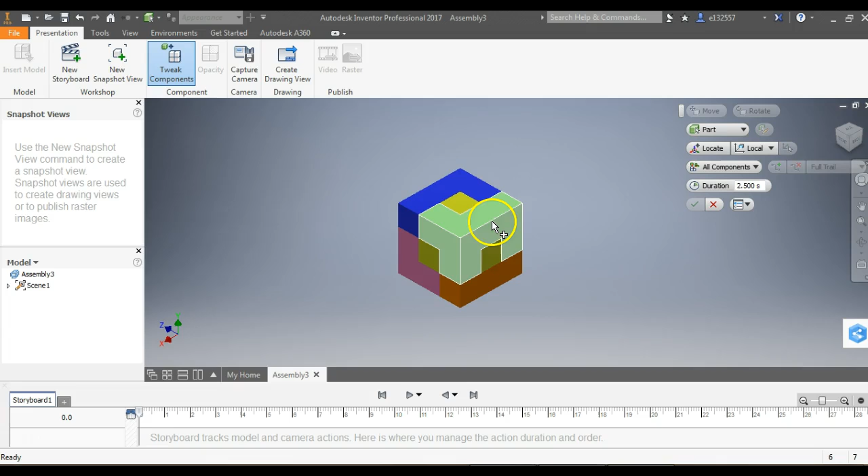And that's tweak components, so I'm going to hit tweak components. What I'm going to do is click on one of these that I want to do, and it puts up this little part here. It says, which direction do I want to move that part out? Well, I actually want to move that part up, so I'm going to click on this one.

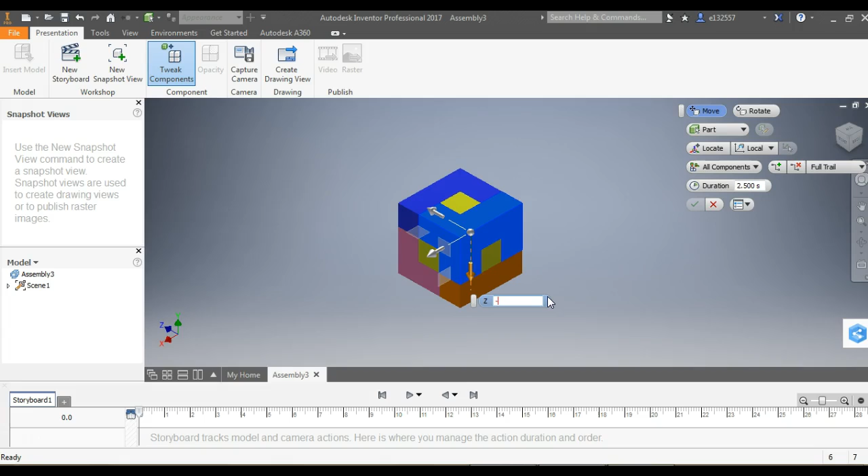But I don't want it going this direction, I want it going the other direction, so I'm going to put -3 inches. That's going to move it -3 inches up. And in fact, it looks like maybe if I go up 4, it'll move it far enough up that it's not overlapping something else. I'm going to hit OK.

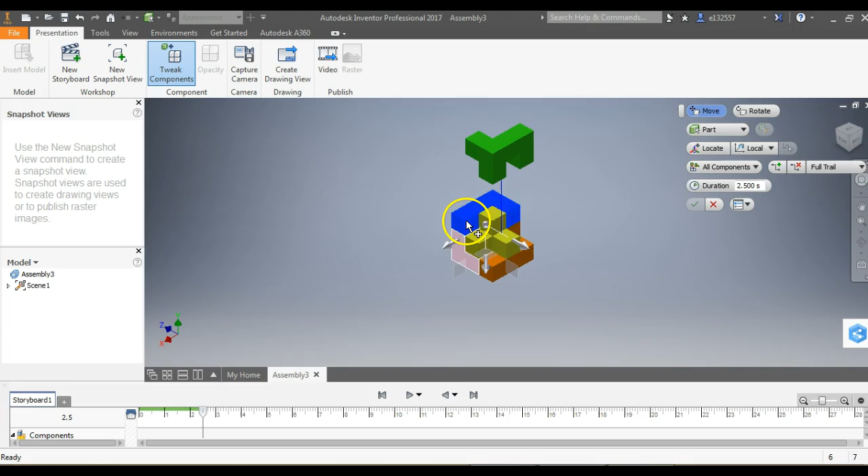Now I'm going to take this piece, tweak components, this piece, the blue one, and I want to go that way, but I want it to actually go into the page, so I'm going to put negative, let's try 4 inches again. Oh, that looks pretty close. So the green one I pulled up, the blue one I pushed back.

Next I would take this orange one, and I want to move it in this direction, but again, I want it to come toward me, the opposite direction of this arrow, so I'm going to put a negative again, 4 inches.

And then the last one is I have my pink piece. I'm going to pull that one down. So I'm going to go back and hit tweak again so I can click the pink one. I want it to go in the vertical, but I want it to go down, so I'm going to put -4 again.

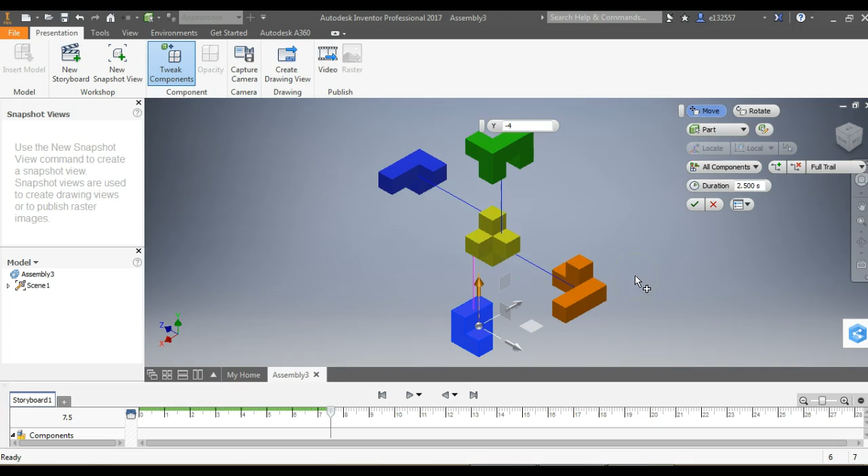Now I want to point out a couple of important things here. When I get this done, check: none of my pieces are overlapping. Notice that none of them are sticking over the top of each other. There's no overlapping, there's no touching. Remember what the emperor says: he says no touchy-touchy.

Now, before I go on, what if I have done this and then I decide that I don't like one of my pieces? Well, if I come over here to this part right here and I click on this, it'll turn this down, and then we just did tweaks. So if I click on this and turn this down, I can see, if I highlight each one, it's highlighting the piece over there.

Let's say that I think the pink one is too far away and I want to change this one. When I click right here, it'll allow me to change this. So I could come back even on all of these and change these to something else if I wanted them to be 3 instead of 4.

Maybe I want all of these to be 3. I'm going to move some of them in. I think that looks a little better. This one, what does it look like if I do 3 on this one? Oh, there we go, double clicked. What if I change this to 3?

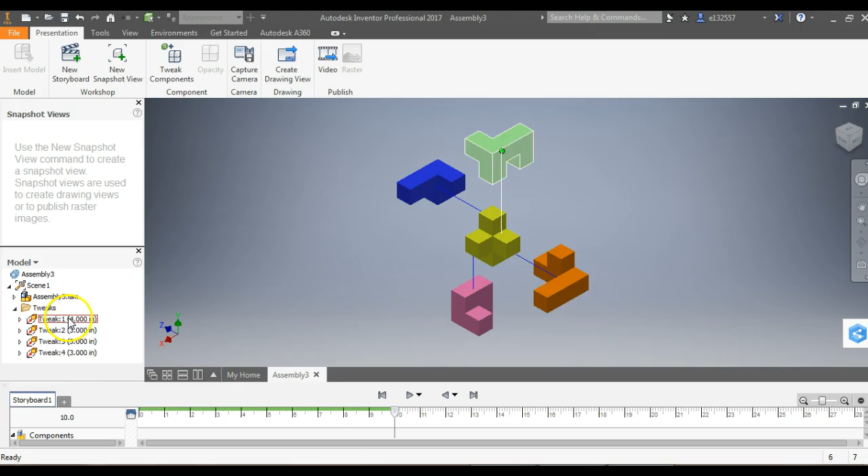Oh, that looks better. I think I still like the green one being at 4, but the rest of them look better. So you can go in and play with that by clicking on them over here to be able to change them. If you double click on them over here, it opens the whole window back up so you can make these changes.

When you get done with this, I have to click here, and then I'm going to go File, Save As, and I'm going to save this as my explosion. Save this into your H drive as an explosion.